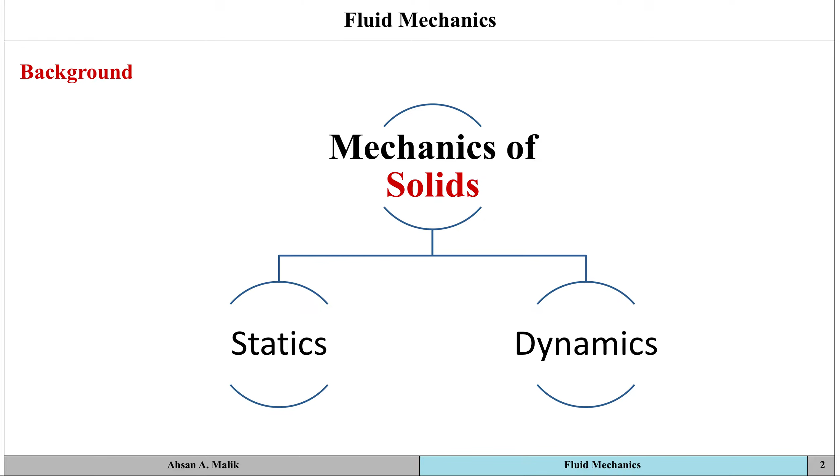And then dynamics is further subdivided into the kinematics of it and the kinetics of it. So when you're talking about kinematics, you're dealing with the body itself. You're not looking at the forces that are interacting with the body. And when you're looking at the forces that are interacting with the body, that is called kinetics. So this is mechanics of solids, when you're dealing with steel, aluminum and stuff like that. But just like that, you also have mechanics of fluids.

So any kind of fluids, we're going to come to the definition in a bit. You're going to be dealing with fluid statics when you're dealing with fluids at rest, and then with fluid dynamics when you're dealing with fluids that are in motion, that are moving. So these are two ways to classify the mechanics of fluids.

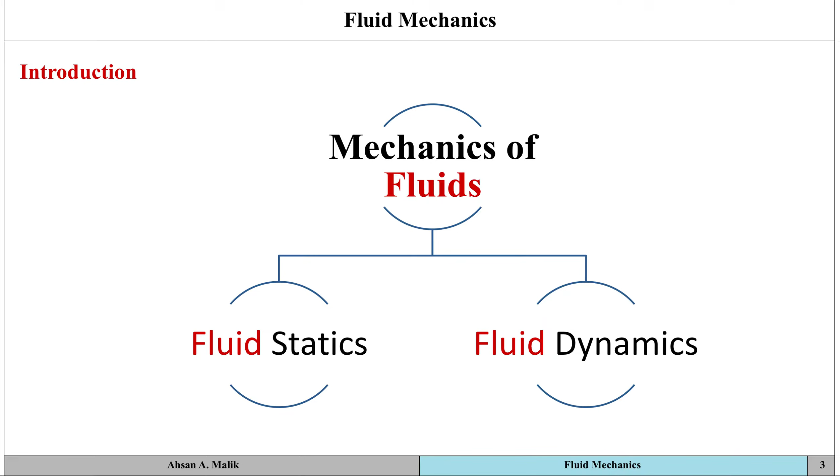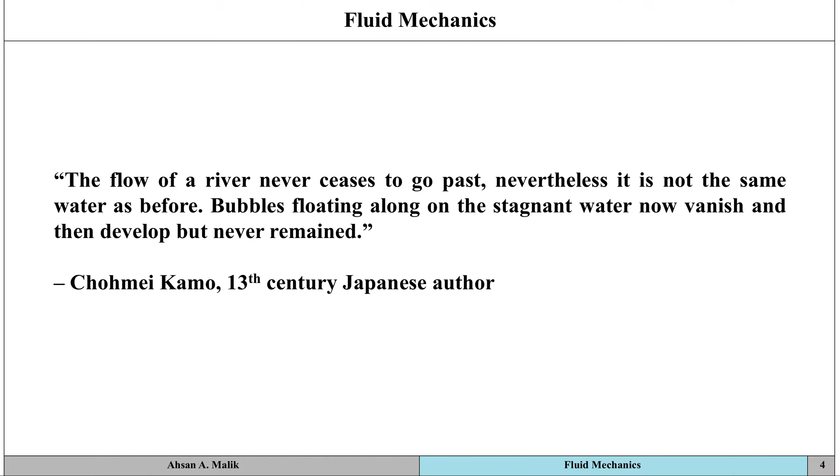And now what I want you to do is just imagine for a second the kinds of fluids that are in and around you, and just take a moment to think about what you can classify as a fluid. Whether you're sitting at home or at work, you're going to have loads of examples around you that, if you were to think about them in detail, you would understand how you classify them as fluids. And that is just for you to understand how fluid mechanics is related to your daily life.

So the most basic example is going to be the blood that is flowing through your body. The blood is flowing through the arteries and the veins, and if you think about it, you could say that the veins and arteries can be modeled as a constant diameter pipe in a way, and then you've got blood flowing through them. So that is an example of a fluid flow.

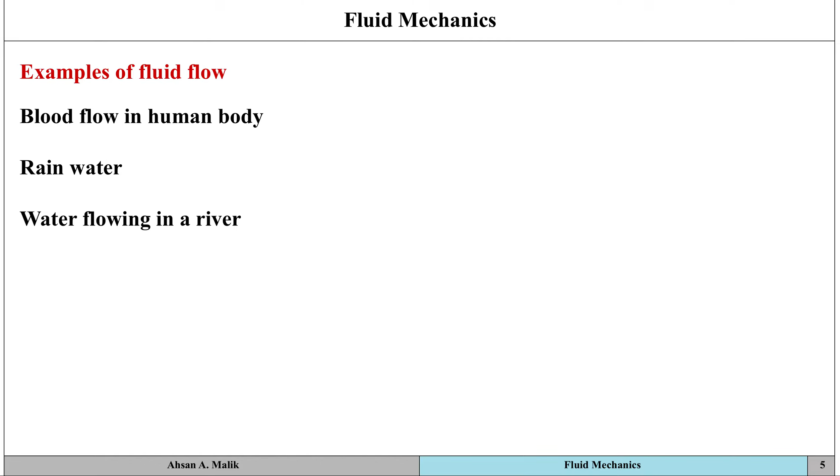Then you've got rainwater, you've got water flowing in a river, and multiple examples as you expand. And so you can go from different scales, from micro scales to macro scales. You can talk about the act of pouring water into a glass, tap water through your pipes, air conditioners, or flow past a bike rider, or the flow of air past a car.

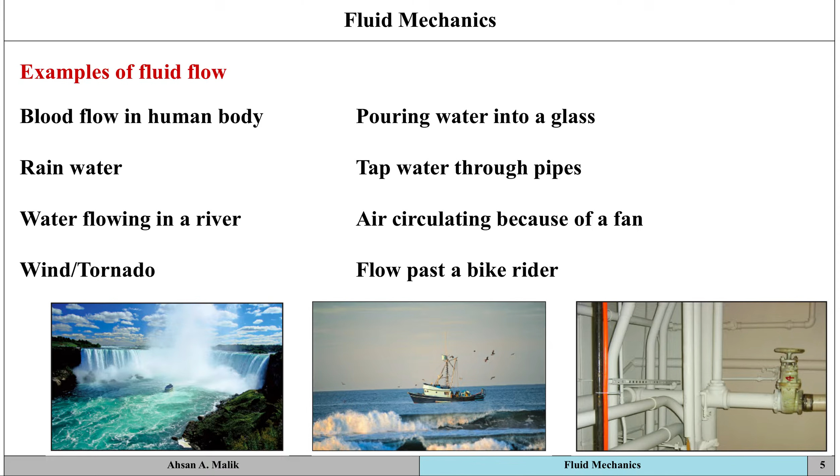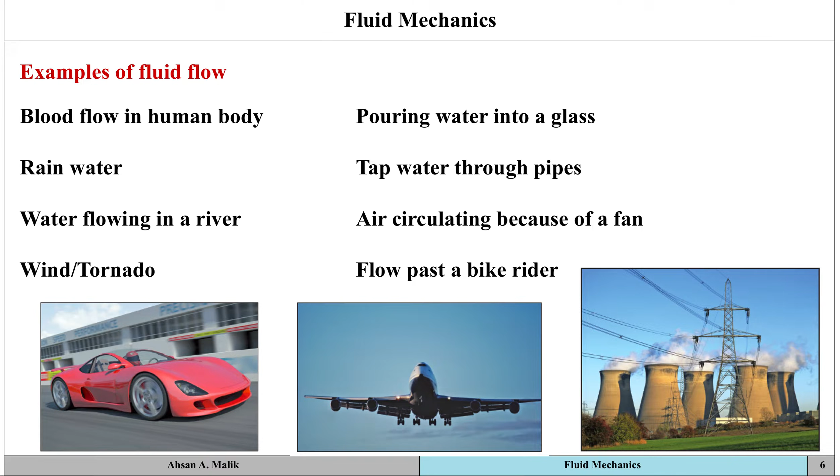So you could see how many different kinds of materials are being classified as fluids. You've got blood, you've got water, you've got wind, you've got air. So all of these are classified as fluids, right? So whether you're dealing with small scale applications of it, like tap water through your pipes, or with industrial applications of it, like aircraft, propulsion systems, cars, automobiles, power plants, all of these are examples of fluid flow.

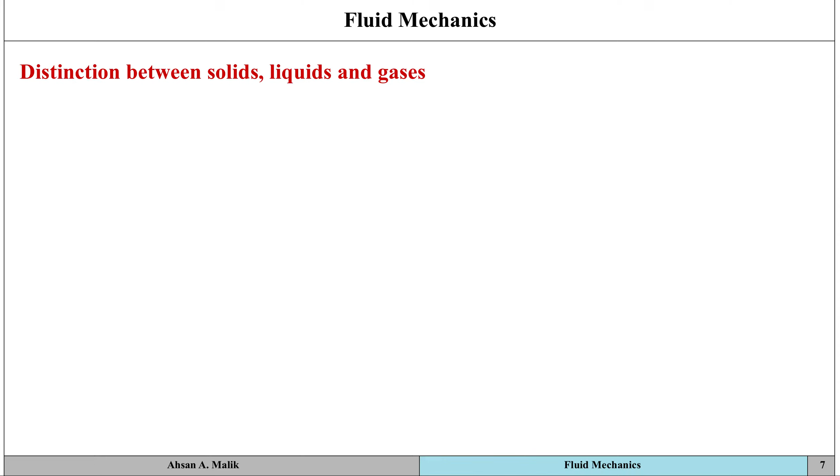So then the question arises: how can we make the distinction between solids and fluids, and what do we usually classify as a fluid in the first place? So as a general idea, if you really think about a solid, it's something that is hard. It's something that doesn't deform easily.

And on the opposite end of the spectrum, you've got fluids, and fluids are softer. They deform easily, like when you pour water into a glass, or when you're moving and the air basically envelops around you. So the air is deforming around your body. It's moving. It's soft. But this is just a casual observation.

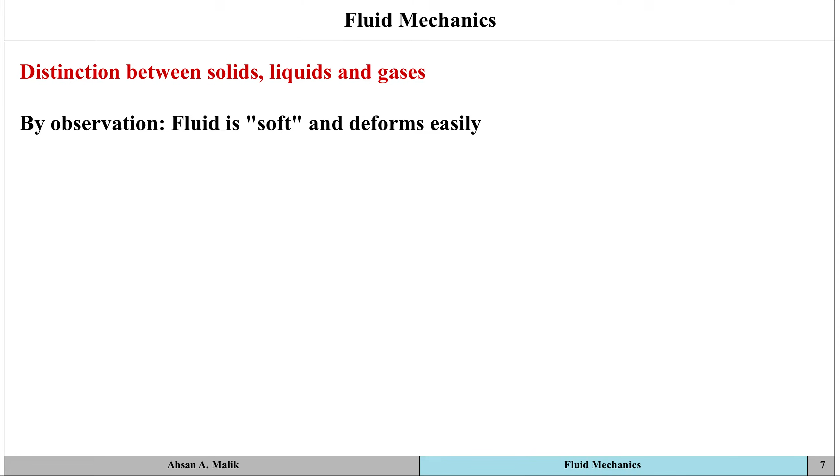So if you were to look at it in more detail, at the molecular structure of a solid, you would find that it has these densely spaced molecules, and they've got these intermolecular forces, and these are really strong forces.

So you've got bonds in here that allow the solids to maintain their shapes, and then they're not easily deformed because they're closely packed together, all these molecules.

And then if you were to think about water or a liquid or an oil, then from a molecular structural point of view, you would identify that the forces between the molecules now are going to be smaller than they were for the solids. And the molecules then have more freedom to move. So then liquids can be deformed easily, and they can be poured into or out of a container.

And then when you move towards the gases, now the intermolecular forces are even weaker for gases, and the molecules have got even greater spacing between them. So there's more freedom of movement between the molecules. And as a consequence of that, the gases are more easily deformable. They're compressible as well, and they will completely fill up the volume of any container that you have. So what that tells us is that both liquids and gases are classified as fluids.

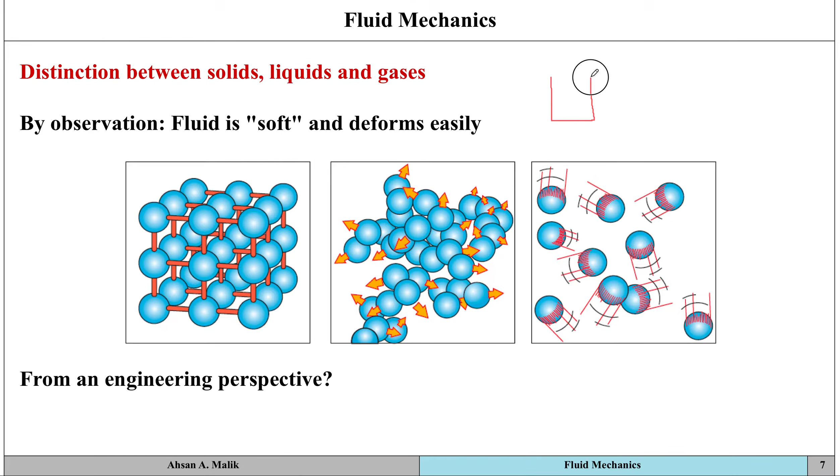So just to give you a background on what stresses are, if you were to, let's say, have this material here, whether it's a solid, whether it's a liquid, let's just think that it's a solid, and it's bounded on this side, so this side is fixed, it's not moving, and you were to apply a force in this direction on this area, then this would be basically a normal stress.

A normal stress would be generated, because if you're applying the force in this direction, then you would have deformation over here if, let's say, the length of this object, you can identify it by L. Then if you're applying this force, there's going to be some minute small deformation, which you could identify as delta L over here. So you've got the stress, which is defined as force divided by area. And because of that stress, a strain is being generated, and strain is nothing but the deformation that is being generated, which is delta L divided by L, change in length by total length.

So just like that, if you had this same solid and you were to apply a force in this direction, in a direction which is parallel to the area, then this will generate a shearing stress, and that is represented by tau. And again, it's going to be force divided by area, except that the force is in the tangential direction now.

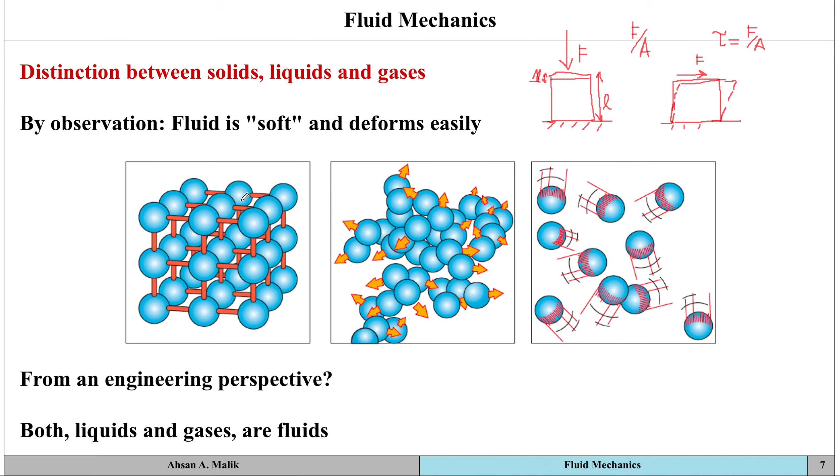So now let me come back to that point: why is this definition, the molecular structural definition, not good enough for us as engineers? To illustrate that, let's imagine that this is one of the molecules of a fluid. Let's say this is a gas or a liquid. It has a certain diameter. If you've got a molecule here, you're going to have another molecule next to it, another molecule next to it, and then there's going to be spacing in the middle as well.

So for gases at usual pressures and temperatures, the spacing between the molecules is of the order of 10 to the power minus 6 millimeters. This is for gases. And for liquids, the same spacing is of the order of 10 to the power minus 7 millimeters.

Another thing that you should imagine here is if you were looking at 1 cubic millimeter of volume. If this is a box, you've got 1 millimeter in this direction, 1 millimeter in this direction, and 1 millimeter in this direction. This is going to make up a volume of 1 millimeter cube. In this 1 millimeter cube of volume, the number of molecules of gas you're going to have is going to be 10 to the power 18.

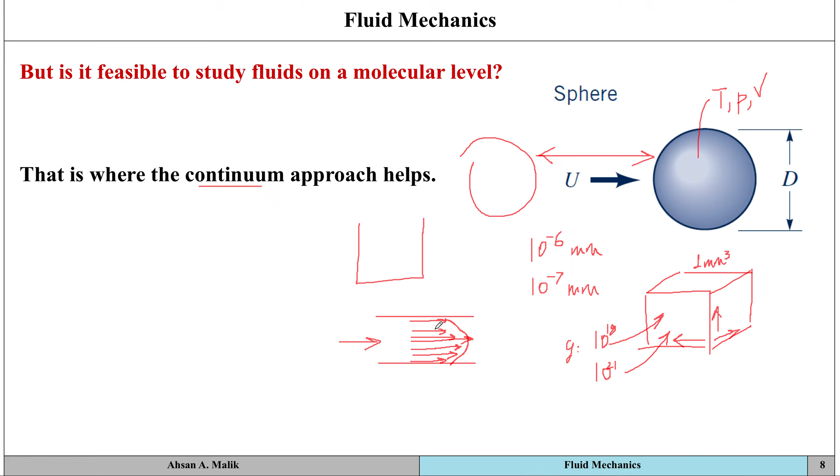So that makes our lives easier. In this way, we found out the velocity variation across this pipe, and this velocity variation is also called the velocity profile. So we assume that all fluid characteristics vary continuously throughout the fluid, and we can take the average values over a volume. That is what the continuum approach is, and how using it helps us in studying fluids.

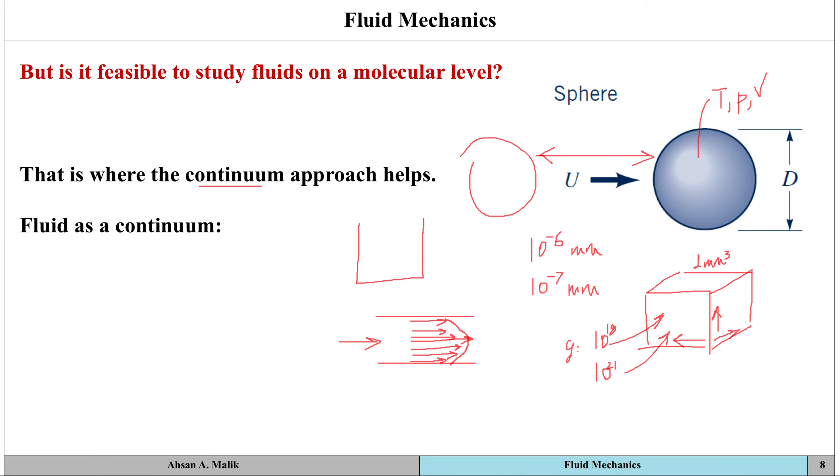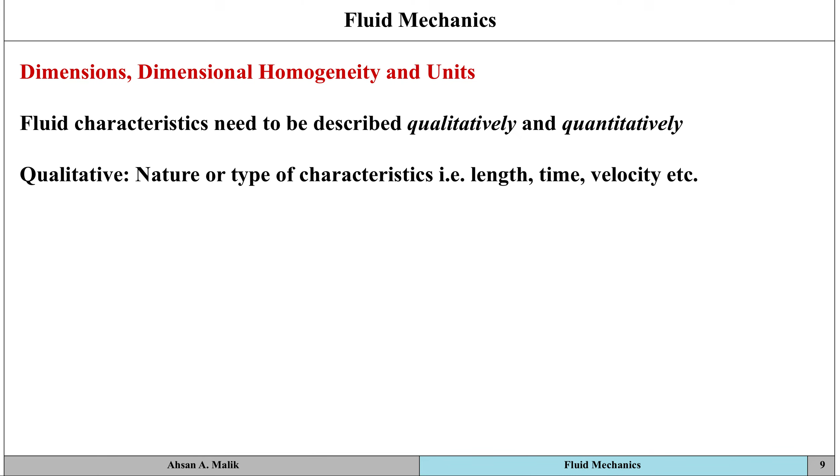Now I'm going to move on and talk a little bit about the dimensions that we use in fluid mechanics and the units that we use. So fluid and its characteristics, we need to describe them both qualitatively, which means that we need to define the type of characteristics. So what the characteristic is, for example, the length or the time, the velocity, and so on and so forth. And then we also need to give it a numerical value, right?

So what is the velocity? Now only a numerical value is not enough, because a velocity of 5 doesn't make any sense. It also needs to have a standard alongside it, so it would be 5 meters per second. Okay, that's your velocity. So you've got the standard and the number that's going to define your fluid characteristic quantitatively.

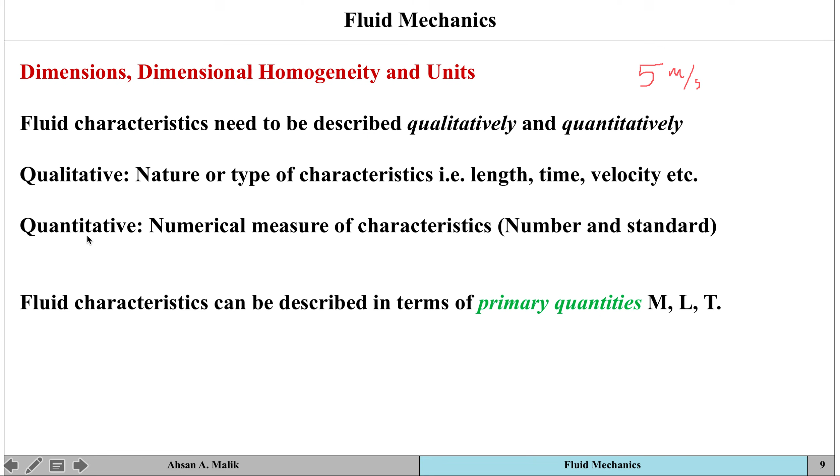Another approach that we use to identify fluid characteristics is based on primary quantities, and the primary quantities are M, which stands for mass. The L here stands for length. The T here stands for time. Don't confuse this with temperature. When we talk about primary quantities, the temperature is usually represented by theta.

And now, how can we use this? Let's just identify some examples. So if you were to look at area, what is area? It's length into width, and both of them can be identified as lengths, right? So area in terms of primary quantities is going to be length squared. The velocity in terms of primary quantities is going to be what? We have to think about it in terms of the equation. So it's distance by time, which means it's length by time, so it's going to be L by T.

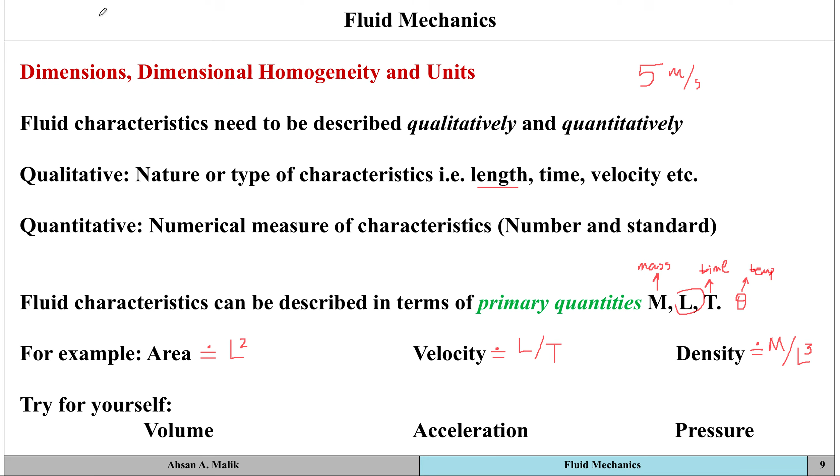And what's the purpose of defining the fluid characteristics in terms of primary quantities? Well, this is going to help us in the future. In the future videos, we're going to see that because of defining dimensions by using these physical quantities, we can look at any equation, analyze it and find out that it is dimensionally consistent. For example, one of the very basic equations for velocity of a uniformly accelerated body is velocity is equal to the initial velocity plus AT, where A represents the acceleration and T represents time.

So the left side of the equation is going to be L by T, or LT to the power minus 1. And the right hand side has to be the same as the left side. So this is going to be LT to the power minus 1, plus acceleration, which is meter per second squared, so LT to the power minus 2, and time is T. Once the minus 2 cancels out, it's going to be the same. So this equation is then dimensionally consistent.

And what this tells us is that all theoretically derived equations are dimensionally consistent, meaning the dimensions on the left-hand side of the equation must be the same as those on the right-hand side, and all terms that are adding up must have the same dimension as well. This is the fundamental premise all derived equations have to be consistent with. Otherwise, we're adding up quantities that are not like for like, apples and oranges, which doesn't make sense. So we use these primary quantities to check that, to give us that qualitative and quantitative description.

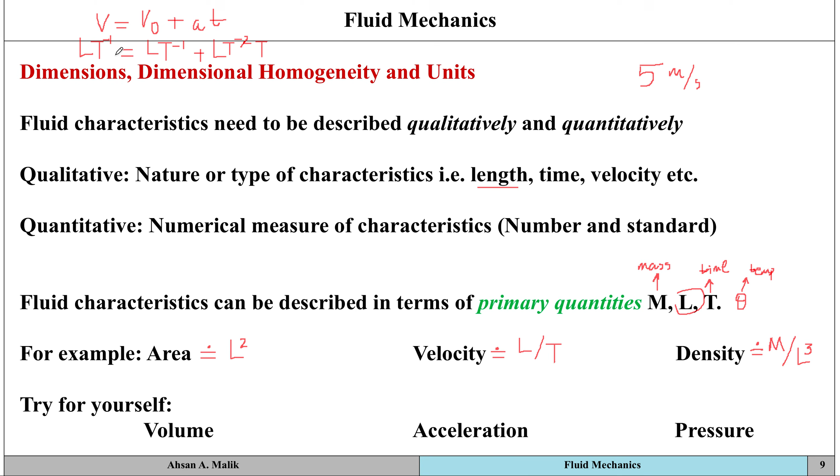Obviously, we can also look at the SI units, which we usually look at, and that's meter for length, kilogram for mass, second for time. So you're also going to be looking at the SI units as well.